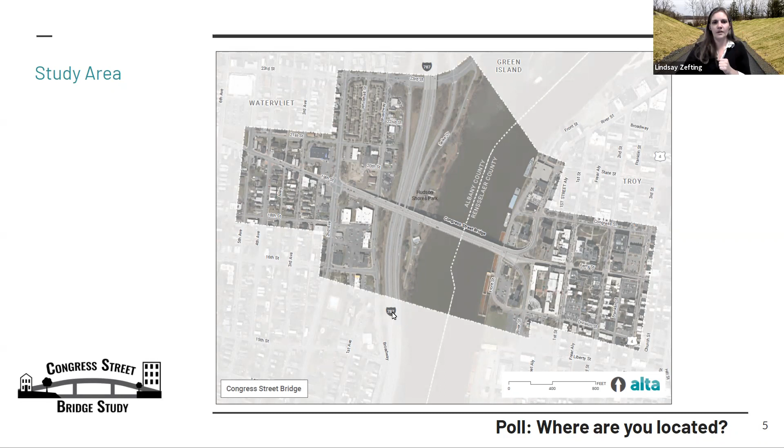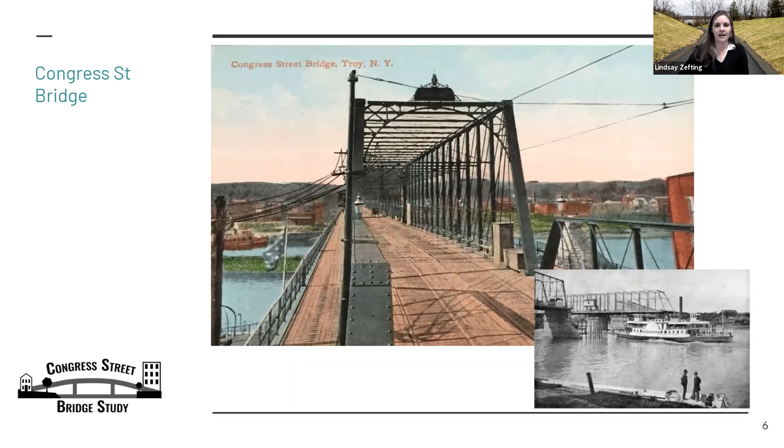One of the things we started with was looking at all the background studies completed. The City of Watervliet, City of Troy, and others have actively been working on this area in a lot of different contexts. We looked at existing projects moving forward as well as studies recently completed, including the Watervliet Shared Use Path, the Mohawk Hudson Bike Hike Trail, and the Empire State Trail.

That path was completed and opened this past year. There's also the South Troy Riverfront Bikeway, completed in 2018.

Troy is working on the extension of South Industrial Road. We also looked at the bike-ped master plans in both communities, the I-787 study among others, and both DRI plans completed for the City of Watervliet and the City of Troy.

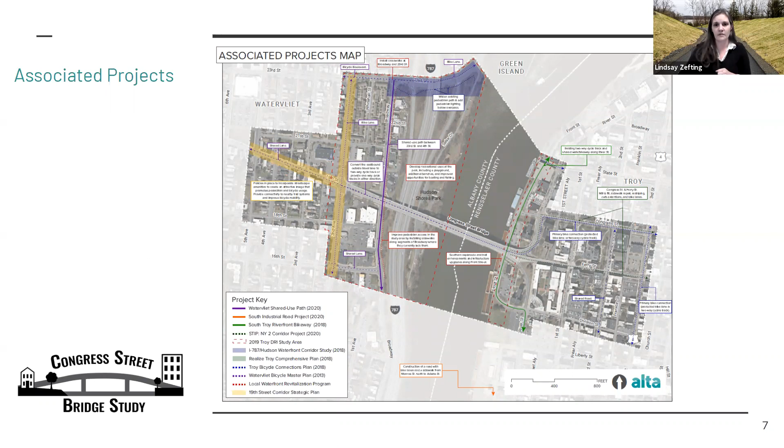We also looked at existing on-road bike facilities — there are bike lanes on 2nd Ave in Watervliet, as well as some shared lanes in Troy and Watervliet.

We also wanted to look at sidewalk connections. Most of the roadways within the study area have sidewalks on both sides of the street, with some gaps or sections with sidewalks only on one side, but generally that pedestrian connectivity or infrastructure is in place, including on the Congress Street Bridge on both the north and south sides.

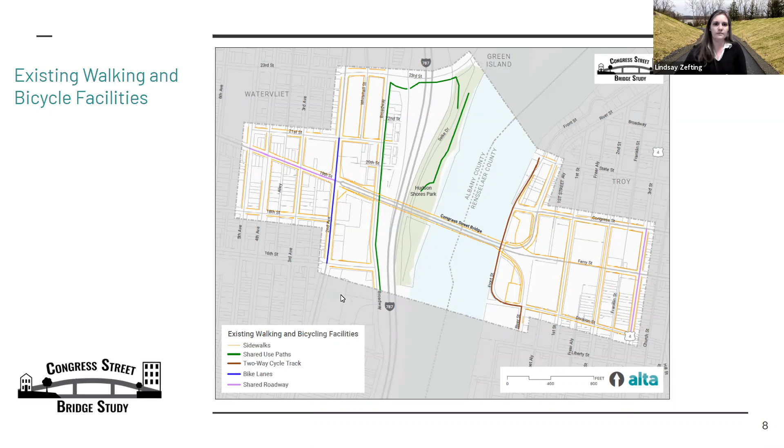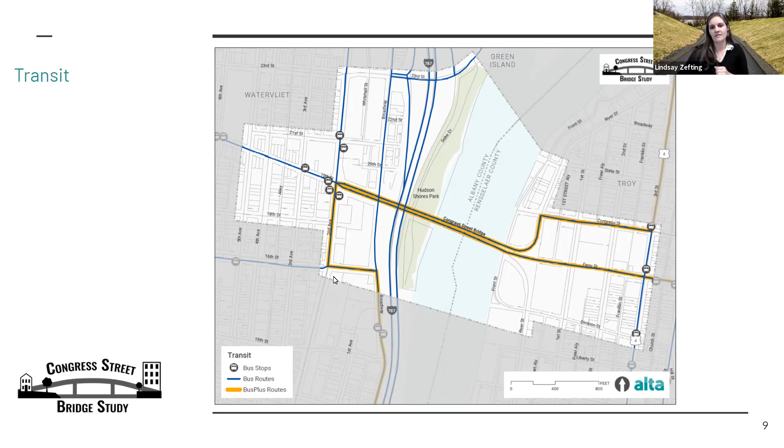We also looked at the existing traffic volumes, which are important for looking at intersection capacity, roadway capacity, whether a roadway is under or over designed, and vehicular connectivity. Generally there's 10 to 15,000 vehicles per day traveling on the major roadways - 19th, the Congress Street Bridge, Ferry Street, Congress Street within the City of Watervliet and Troy. But the minor collectors tend to be 2,500 to 10,000 vehicles a day. So that 10 to 15,000 threshold isn't significantly higher, and wouldn't warrant an increase in capacity.

We also looked at the city zoning. We wanted to look at that land use - there's a strong connection between land use and transportation. So we looked at the zoning within the City of Watervliet and the City of Troy. Generally within the study area, it's all higher density - business, mixed use, residential being multifamily or 2-family. There's also institutional land use, which would be Sage College within the City of Troy.

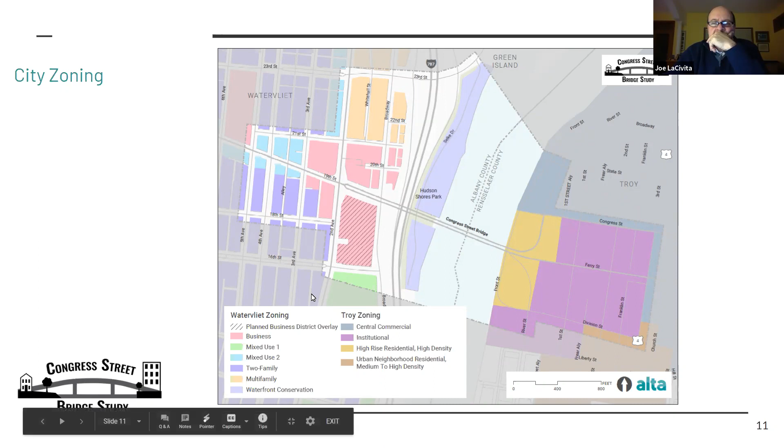Beyond zoning, we looked at the actual land use, the building footprints. You can see there's a lot of commercial activity within the study area. Again, the community services or institutional uses, but there's also some residential within the study area, small pockets of vacant lands, and obviously some significant parkland as well with Hudson Shores Park in Watervliet.

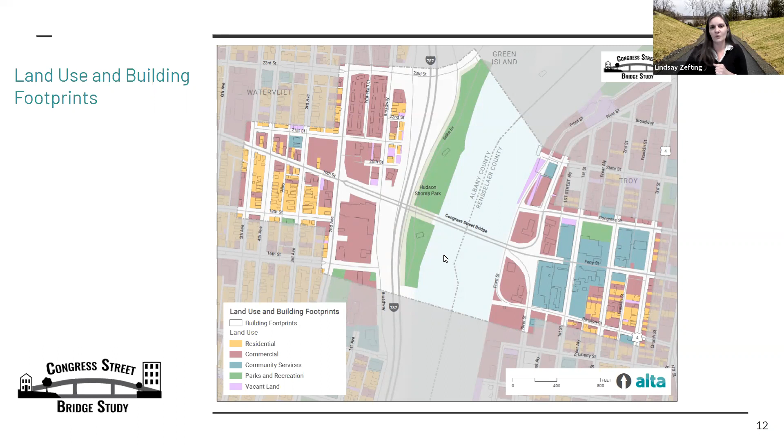We did look at the acreage of these land uses. We broke it down to residential, commercial, and community services - private versus public. One of the things I thought was really interesting in looking at this data is the high percentage of public land within this study area. You have 30 acres of the Hudson River if you look at the study area in total, and 30% of the study area is public right-of-way, within either DOT or local municipality control. If you discount the Hudson River, that public right-of-way makes up almost 45% of the study area. So it's a significant portion of land to be addressed on how we want to use it as the public.

We also looked at the natural and historic character. We looked at topography, which has its own challenges within both communities. We looked at the 100 and 500 year floodplains. We also wanted to take a look at historic sites within the study area to make sure we're factoring that into any recommendations.

With that background information, we started discussing with the steering committee as well as a number of stakeholders, ranging from New York State DOT to the Troy Housing Authority, what the opportunities and challenges are within the study area, identifying what we're calling priority projects. We identified a number of other potential recommendations for bicycle and pedestrian connectivity and general traffic flow, but these are the priority projects that really rose to the top: implementing a shared use path on the Congress Street Bridge, connecting River Street, converting Front Street to a trail, looking at the Ferry Street corridor in Troy, looking at the 19th Street and 2nd Ave intersection and really downsizing that, making it more pedestrian scale, a southern connection to Hudson Shores Park, and traffic calming and enhancing that access to Hudson Shores Park. I just went through this really quickly - I'll go through them in a little bit more detail in the map view.

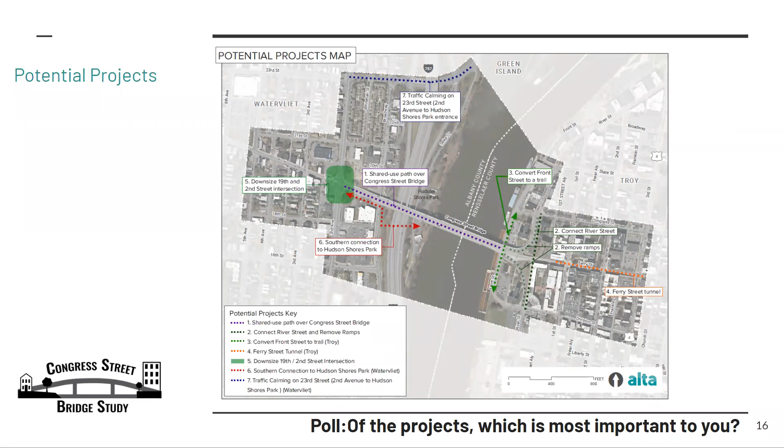Okay, sorry about that. So converting Front Street to a shared use path, we'll be looking at traffic circulation and making sure that people can still get to where they're going.

Part of the reason that we can close that portion of Front Street is by removing the slip ramps that come off the Congress Street Bridge, and actually connecting and reconnecting the street grid at River Street. So that is one of the proposed projects.

So that better connection to the street grid, Riverfront Trail, and the Ferry Street Tunnel is a little bit of a disconnect, as much as my kids absolutely love driving through that tunnel. The pedestrian connection up and over the tunnel is a little bit hidden.

So how do we enhance that connection and make it more visible and viable for people to connect down to the river, the new Riverfront Trail?

Looking in Watervliet, we're looking at a potential southern connection to Hudson Shores Park. 23rd could absolutely use some enhancements, some traffic calming, some pedestrian connection.

So it's a little bit more clear. It's a lot of vast pavement, and that makes that northern entrance to Hudson Shores Park a little bit more uncomfortable and certainly more vehicle oriented.

But having a southern connection to Hudson Shores Park would also enhance that connectivity and circulation and access to the park as well.

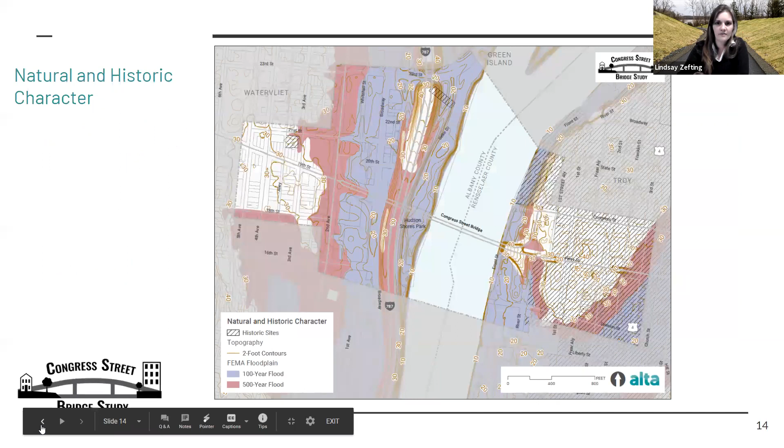So there was another question here about traffic counts. Actually, I don't know how easy it's going to be for me to go back to the traffic map. Actually, pretty easy.

Noting that there's 15,000 vehicles a day on the bridge, but the ramp doesn't quite add up. Yeah, it's because it's counting traffic on the ramps and Ferry Street, so they more or less add up. Counts are taken at different times, so traffic isn't always an exact science. But we are looking at the vehicle movements at the intersections, as well as on the main thoroughfares.

We're also looking at whether the traffic studies differentiate between cars and trucks, that was the other question. Yes, the traffic data we have does differentiate between vehicle and truck traffic. I don't have the percentage of truck traffic off the top of my head, but there are certain turning movements that are pretty high. Can you guys see my pointer on the screen?

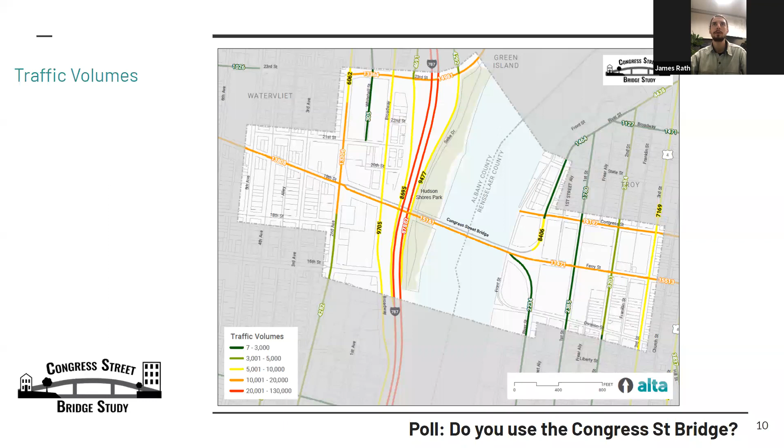James, is there anything as part of the South Industrial Road project that would shift some of that traffic south as well? It really does depend, and we're not quite at that point yet to have a concrete answer. I'm hoping the next presentation we can revisit that. The goal of the South Troy Industrial project, which I'm not the project manager on, is to take truck traffic off the existing street network in South Troy on 2nd, 3rd, and 4th, and push it onto the new road. So the access point might be easier for those trucks to go south and over the Menands Bridge.

Funny enough, though, the DOT is looking to potentially replace that bridge as well and possibly move its location. So we have to keep that in mind when talking about where that traffic is going to go - a bit of a moving target for us. I imagine the Troy-Menands Bridge study will happen over the next 1.5 to 2 years, likely a time frame for that study.

Are there any other questions or comments? Does anyone have any ideas for the shared use path across the bridge, what they'd like to see there, or a particular pedestrian or bicycle connection we should be looking at or enhancing, or waterfront amenities we should be considering?